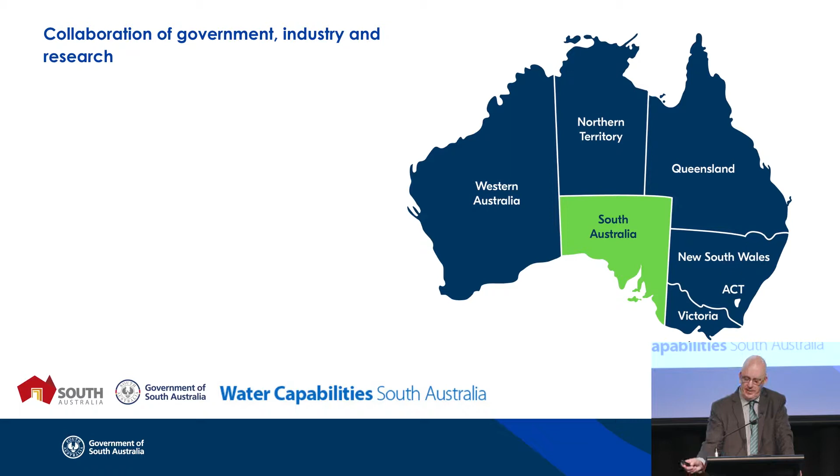So South Australia, it's obviously the central southern part of Australia, and here's a bit of some statistics. We have a population of about 1.7 million people. The capital is Adelaide, my hometown. An area of 984,000 square kilometres - Google's a wonderful thing, I Googled the size of New Zealand this morning, and that's actually about 4 times the size of New Zealand.

We have around 27,000 kilometres of water main. We distribute around 200 gigalitres of water each year. Our Australian Water Quality Centre undertakes about 300,000 water quality tests each year, and we distribute all of those 200 gigalitres in accordance with the Australian Drinking Water Guidelines. On the wastewater side, about 9,000 kilometres of sewer, 370 kilometres of recycled water main, and we recycle on average about 35% of all of our wastewater produced.

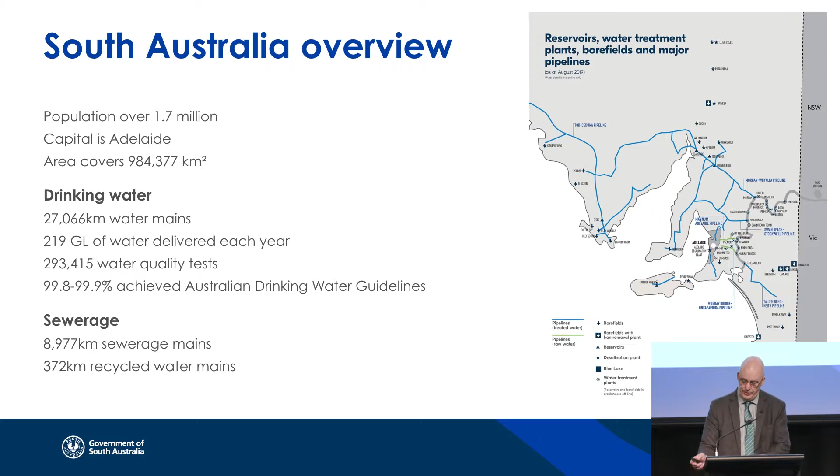We have a diverse range of water sources. The River Murray is on most occasions our main water source. It's about 80 kilometres from Adelaide, and we need to pump water over the top of the Mount Lofty Ranges. We also use natural catchments in the Mount Lofty Ranges for a large portion of our water supply.

Desalination - we have a major desalination plant that was built during the Millennium Drought. Groundwater is also a source of water for a number of our regional centres. And as I said, we recycle about 35% of our wastewater.

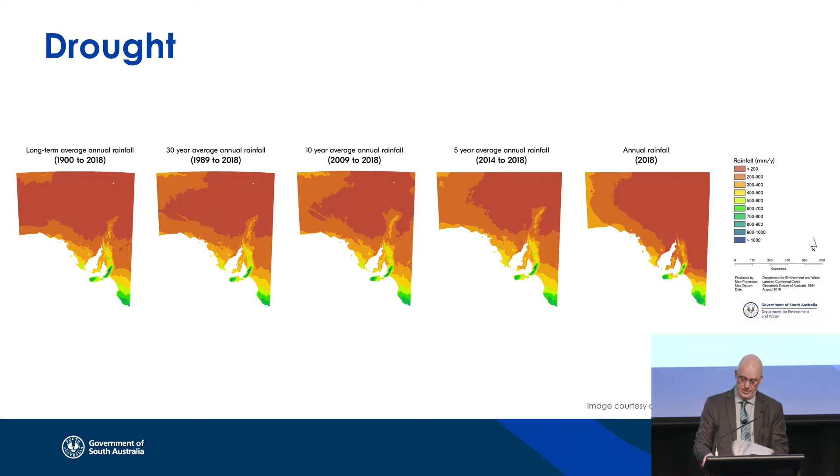And to show you the flip side, that's the Callamurra waterhole in the far north. The shot on the left-hand side is from 2004, in the middle of the Millennium Drought, and the shot on the right-hand side is from 2010. So it shows you how quickly things can change. As I said, there's the same amount of water in the world this year as there was last year and will be next year - it's just not always in the place you want it at the time you want it.

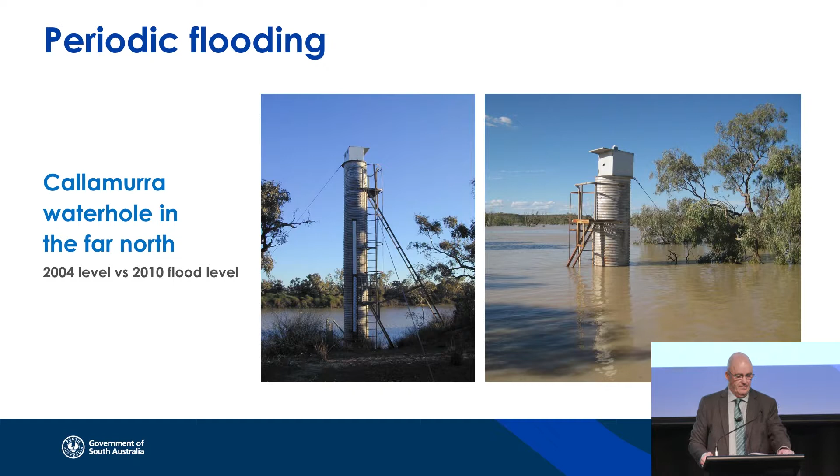I touched on the Murray-Darling Basin system before, and as I said, that crosses 4 jurisdictions effectively: Queensland, New South Wales, Victoria and South Australia. And I guess if nothing else, the Millennium Drought really showed us in Australia that without effective cross-jurisdictional management of water, the country was in a lot of trouble. And what that meant is that we had to establish some very strong ties between government, industry and our research organisations.

And that's really, I guess, the main topic of my talk today - to reinforce to all of you how important it is for water management to have the 3 levels of our water industry working effectively together, and to put in place those connections and partnerships, because when you're trying to manage water in a country the size of Australia across all those different government levels, having those strong connections between government, industry and research is really critical.

We put in place, through the Murray-Darling Basin Authority, the Murray-Darling Agreement, or the Murray-Darling Basin Plan. It is in operation today - 10 or more years since it was originally put in place - and it effectively manages the water split between New South Wales, Victoria, South Australia and the environment. It recognises the comment I made before, that without effective use of water in the environment, you don't have a healthy river system. And if you don't have a healthy river system, you don't have a good irrigation business, you don't have strong communities, and cities like Adelaide really struggle in terms of water quality. So that was a huge step for us back in the early 2000s.

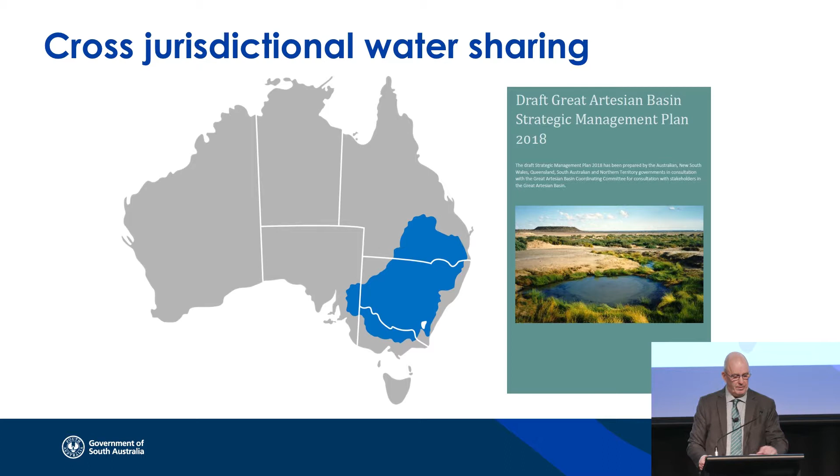It will really test that theory that I had before about strong collaboration between government, industry and research. So to show you a little bit about how our supply sources have changed over that period from about 2005 through to now, and how we expect that to progress into the future.

The large part of the pie chart there is rivers, reservoirs and aquifers, and you can see back in 2005 that was about 75% of our water supply.

Importantly, the light green section of the pie chart there is called water restrictions, and the part you'll notice is that as we look ahead to 2050, there's no water restrictions.

So we really are backing ourselves across all those levels of the industry to be innovative, to meet the demand increases that you can see in the size of the pie chart there, and to not impose water restrictions on our communities, because what we know is that if you restrict supply of water, then that is an economic handbrake to the community, and we saw our gross state product go backwards through the Millennium Drought, and it's not a position that we as a society want to be in again.

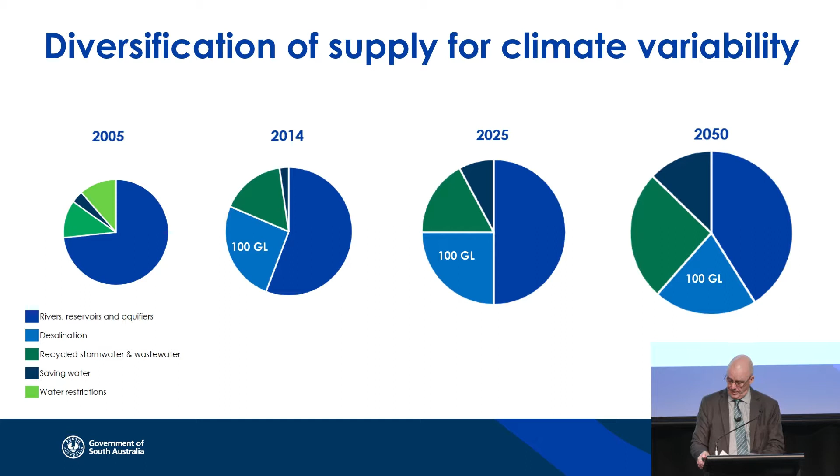So what have all those challenges meant for us as an industry in South Australia? Rainwater harvesting and managed aquifer recharge has been a key component of how we've set ourselves about meeting those challenges. Local, small-scale wastewater treatment and reuse is also key, slowly moving away from the days of large, centralised wastewater systems to more local systems, and I did note that's very similar to the thoughts that Art was sharing.

Energy management and data analytics has been a huge component, and one of the case studies I will talk about will elaborate on that a little bit more. Irrigation efficiency, looking very closely at our irrigation systems and making sure that farmers are irrigating at the right time with the right soil moisture content has also been a big push for us.

Water quality monitoring and response. Water supply optimisation is another case study that I will talk about in a little while. And again, I've touched on the policy frameworks that are really necessary to make sure that we get that cross-jurisdictional collaboration.

You know, we unite pretty well as a country when we play cricket against New Zealand and those sorts of things. We don't always unite that well within our own country. It does take strong government to make sure that our states are working together collaboratively and that we're setting a scene for industry and for our research bodies that can help meet the challenges as we go forward.

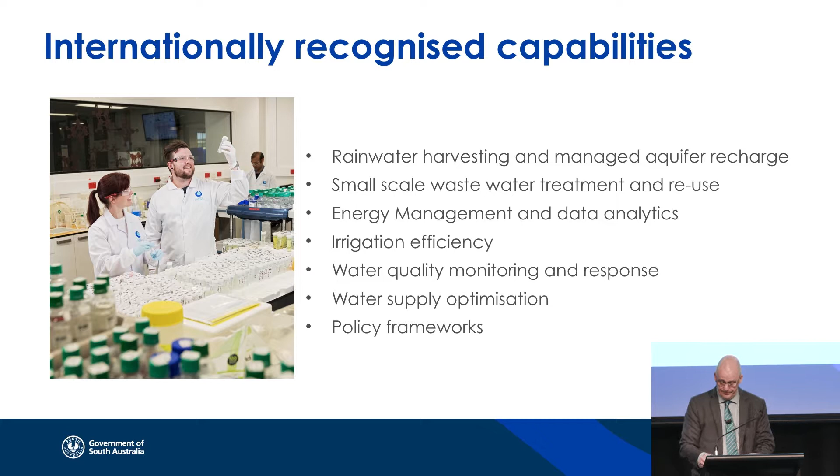So the case studies. Before I go to those, just a little bit about South Australia. I've touched on the 1.7 million people.

SA Water Corporation that I worked for has a revenue of about last year it was about $1.5 billion. We have 1,500 people that work for SA Water, but more importantly, I think, is if you look at the supply chain that supports SA Water every day of the year, so 365 and a quarter days of the year, we supply water and wastewater services to the community of South Australia.

But if you look at the number of people that are actively involved in providing services to SA Water, it would be a number of between 4,000 and 5,000 people on any one day. So we are largely an outsourced organisation, and that really does mean that we need those collaborative connections in place. And we also have about $14 billion worth of assets.

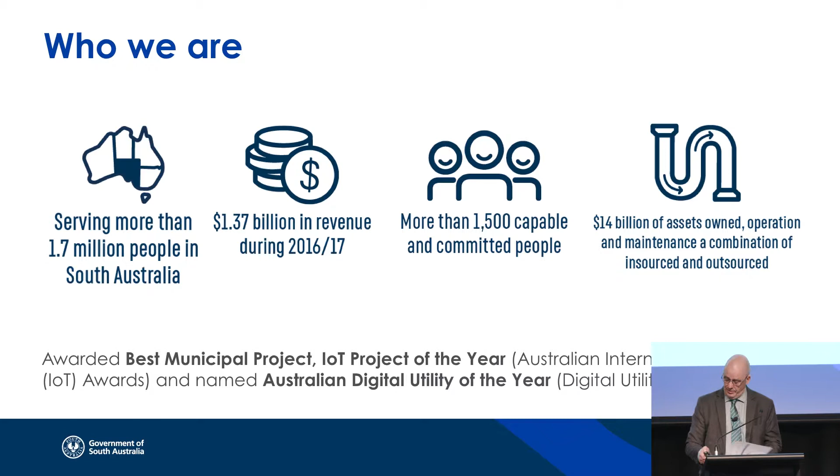So the first of the three case studies that I wanted to talk about is what we call our zero-cost energy future. This exercise focuses on a number of things, but electricity price has been a major cost to SA Water. Last year we spent $82 million on electricity, and our plan is to get us to the point where we will have zero net electricity cost by about the end of next year. It's a very ambitious plan. It makes me feel very nervous, but unless you set yourself a stretch target, you won't push yourself and you won't achieve the best possible outcome.

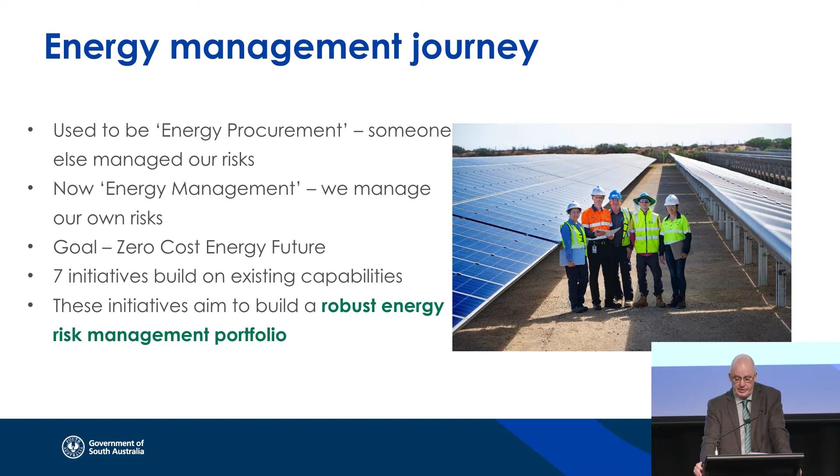So we set ourselves the plan of moving really from energy procurement - setting up a deal with electricity retailers to buy electricity at a guaranteed price - to energy management, effectively managing our own risks. The zero cost energy future is actually built around seven key initiatives.

And they are, firstly, demand response. What we know with our system is that a tank is actually as good as a battery, so that if you can fill your tanks when electricity price is low and empty them when the price is high, then that's as good as a battery.

Biogas generation is a key platform for us. Our two major wastewater treatment plants in metropolitan Adelaide, the Bolivar plant and the Glenelg plant, are now almost completely self-sufficient. Bolivar runs at about 93% and Glenelg runs at about 87%. Bolivar, with the right set of conditions, actually puts electricity back into the grid that we get money for. So biogas generation and efficient digestion and energy generation at our wastewater treatment plants is a key platform of our zero-cost energy future.

Backup diesel - we realised that we have multiple diesel generators at sites right across our network, and for the large part of the time they sit there and aren't used. We've also worked out that there's a trigger point that electricity price hits when those generators are actually cost effective to run. So incorporating those into the operating system on a more regular basis is part of our zero cost energy future.

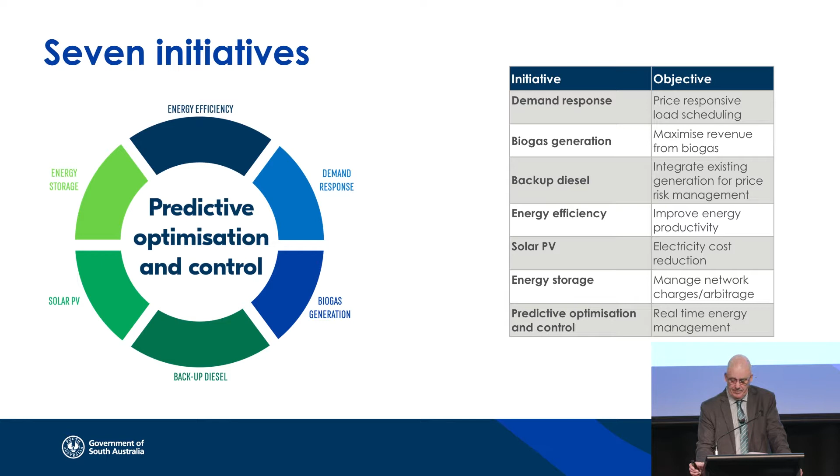And the last two are really the part that we are most involved in at the moment, and that is solar PV and energy storage. So we are in the process of installing 153 megawatts of solar generation at 70 sites across the state - that's up to 70 sites. To put that into context, that's about 500,000 solar panels that need to be installed between now and the end of next year. Coupled with that is 35 megawatt hours of battery storage, which couples with the tank analogy that I was talking about before.

The statistics are interesting, but that's an investment of around $390 million with a payback period of about 5.5 to 6 years. The part that really makes it interesting is if you think about those 70 sites and you think about an electron that is generated from a solar panel. When that electron's generated, you can do one of three things with it. You can use it in the pump or the facility that the site, the panels, are located alongside.

You can put it into the battery and store it and use it later on, or you can put it back into the grid and the retailers will pay you some money for it. So the real question is, how do you decide what to do with that electron? Because overlaying all of that is the need to supply water and wastewater services to our customers as well.

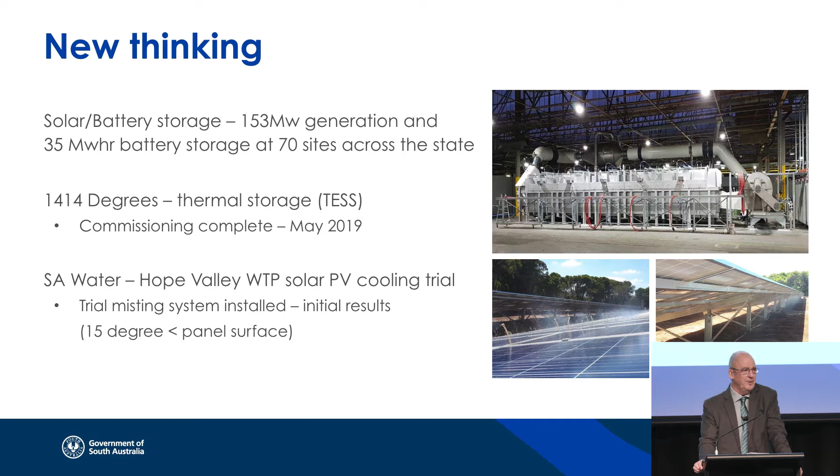The next case study I wanted to talk about is our smart networks. We work in a regulated environment in South Australia. The Essential Services Commission of South Australia is our economic regulator, and one of the things we do to inform how we invest our customers' money is to ask them how they would like that money invested.

They were very clear when we spoke to our customers about the 5 key things they expect from SA Water. Firstly, they expect safe, clean water—it goes without saying in a first world country. They want assurances on price and serviceability. They want water security, which we've touched on before. And they want consistent high quality water, so water that's not only safe but tastes good to drink.

The second most important thing behind safe water was minimal interruptions. One of the things we noticed is that the central business district of Adelaide is quite unique in the distribution system, and we noticed we were getting a significant increase in the number of water main failures in the central business district. It was about double where it was in other parts of the state, and obviously that comes with a huge community exposure.

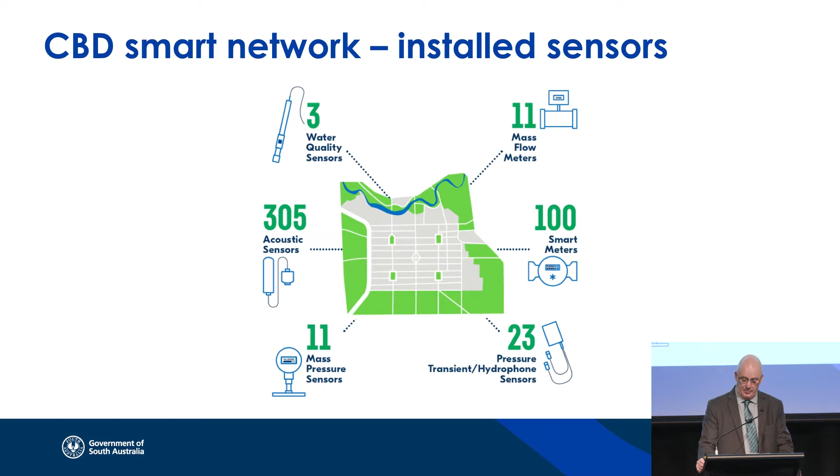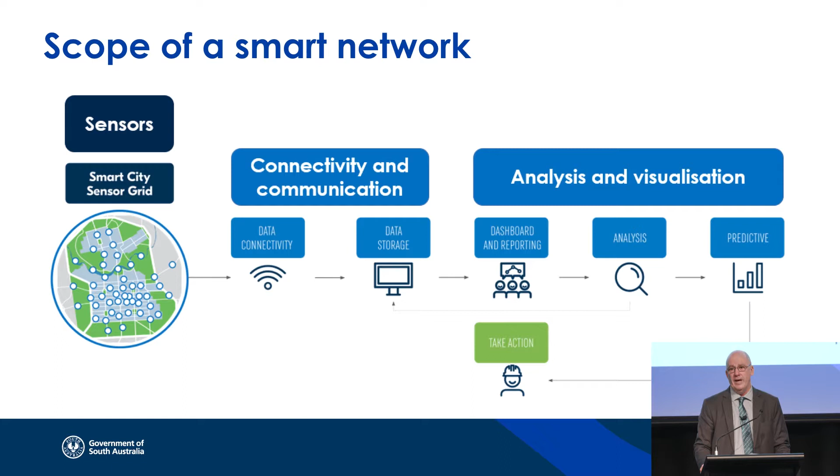What we did with all of that is connect it effectively through the Internet of Things. All of that information goes into a data storage and data analytics area, and the same smart people working on the data for Zero Cost Energy Future are also working on the data here, looking at what trends start to project a water main failure. So what we now have is a system in the Central Business District of Adelaide that gives us predictions of when our water mains are going to incur a problem.

So what has that done for us? The upshot is that we're now at a position where we've been able to predict ahead of time about 50% of the water main failures we experience in the CBD. Whilst that doesn't stop the main from failing, it does allow us to fix those failures outside of normal business hours. So we minimise the impact to our customers, we minimise the exposure we have as an organisation.

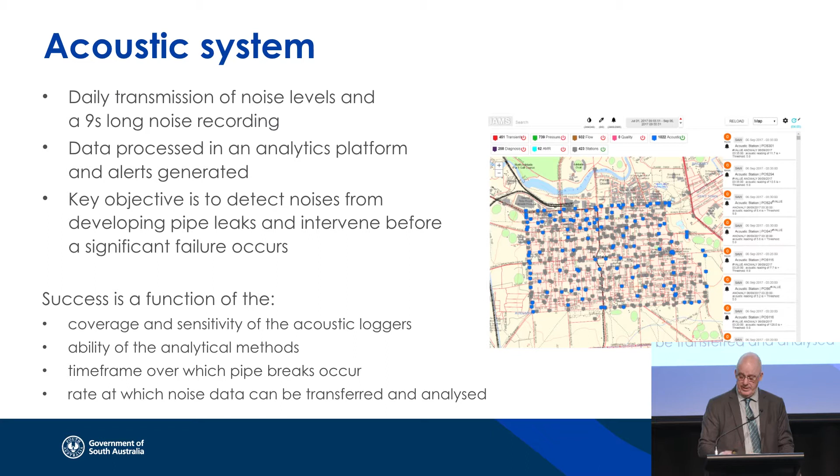The really interesting part is that when we do our customer research and ask customers about their perception of SA Water and what they want from us as an organisation, those that have heard about smart networks have a dramatically increased opinion of us as a utility. We really do think this is the way of the future. I've touched on most of those, and that's the result.

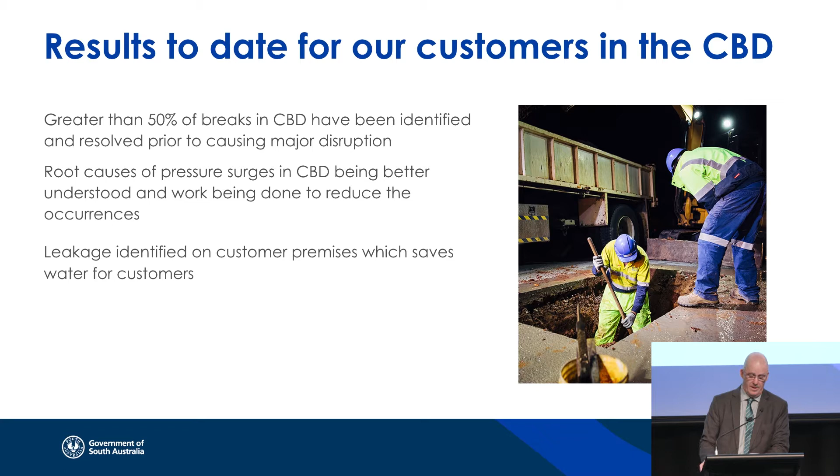So the next steps - we're currently trialling, we've expanded our smart networks in the Central Business District to North Adelaide, which is just to the north of the CBD. We're also looking at sensors on major trunk systems so that we hope to be able to install predictive sensors on our major trunk mains on main arterial roads to minimise the impact to traffic.

We're looking at improved pressure management and pressure modulation, and expanding the use of smart meters in our distribution system. What we've found is that whilst there's a benefit to the customer, particularly large use customers, the information we get in terms of time and volume of water use at certain times gives us really good data to better plan and manage our distribution system. We've also started to look at smart networks on the wastewater side, installing sewer overflow devices in high overflow areas with some really good results in predicting when an overflow is likely to occur and fixing it before there's a problem.

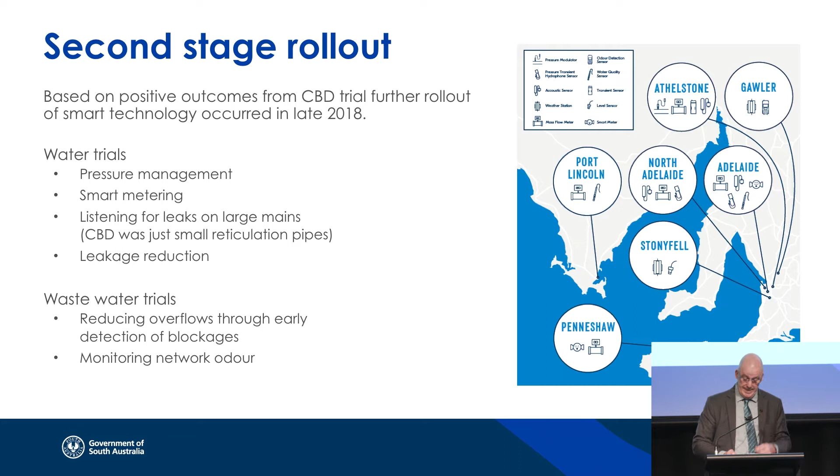So smart networks has been a success for us and something that's certainly improved our brand as an organisation. The last of the case studies that I wanted to touch on is what we call our distribution optimisation tool.

The point being is that it's a very large and very complex system to operate, and traditionally it was done on zones. So different parts of the city were supplied water from wherever their closest treatment plant was.

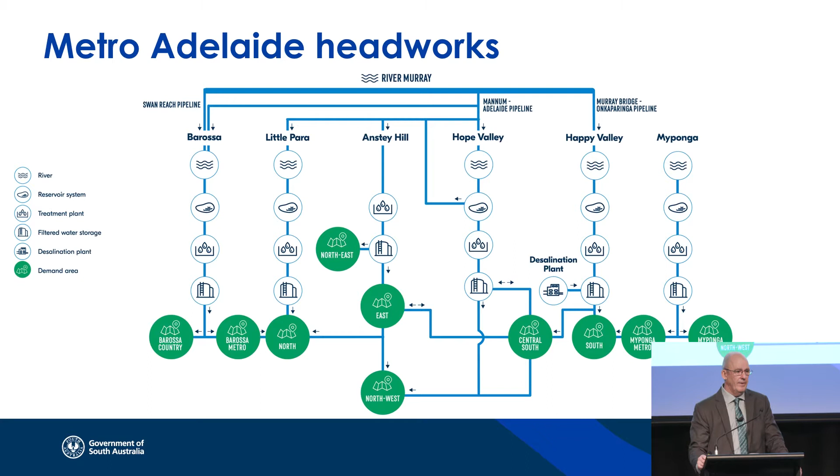What our distribution optimisation tools have enabled us to do is manage those conflicting factors - the balance of natural inflows into reservoirs, unplanned outages, those peaks in electricity price that I was talking about before. Obviously, with $14 billion worth of assets, there's going to be planned maintenance work that needs to occur. So there's planned outages, changes in water quality, changes in demand, and over time changes in infrastructure capacity.

So the distribution optimisation tools really look at the cost of operating each of those systems, overlay that with electricity prices, and it optimises the way we should operate our very complex system, and the way we should plan for operating it into the future.

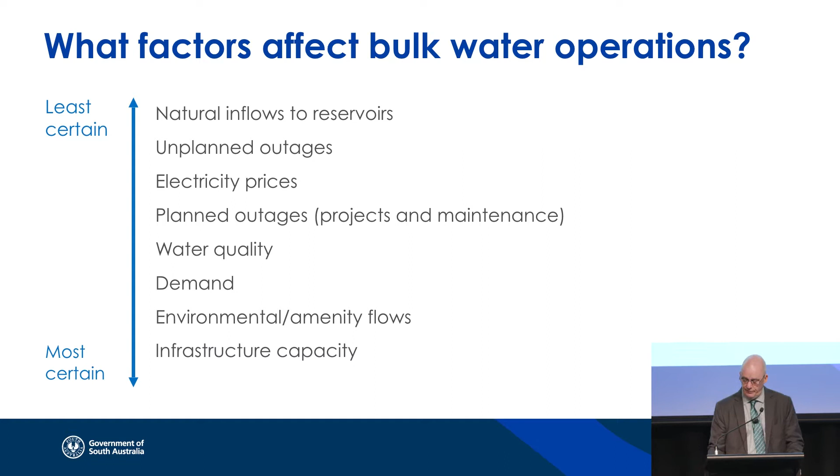It does that on a daily, a weekly, a monthly, a quarterly, and a yearly basis. It's actually the set of tools that we now use for our budgeting, and we manage our 27,000 kilometres across the state using these distribution optimisation tools.

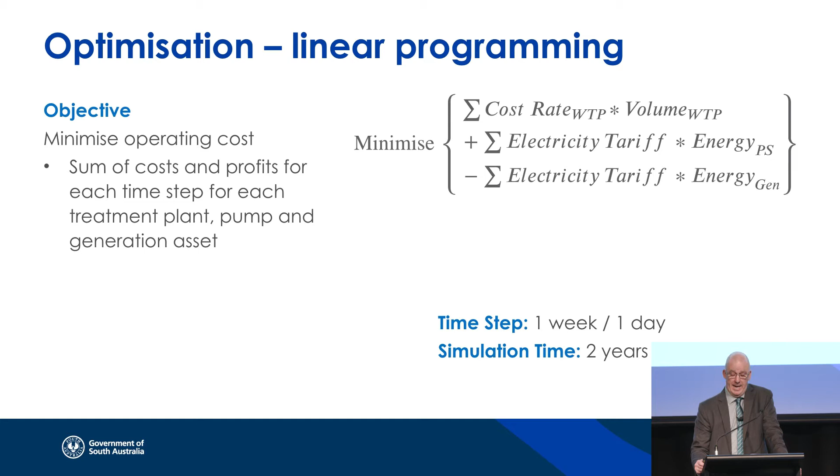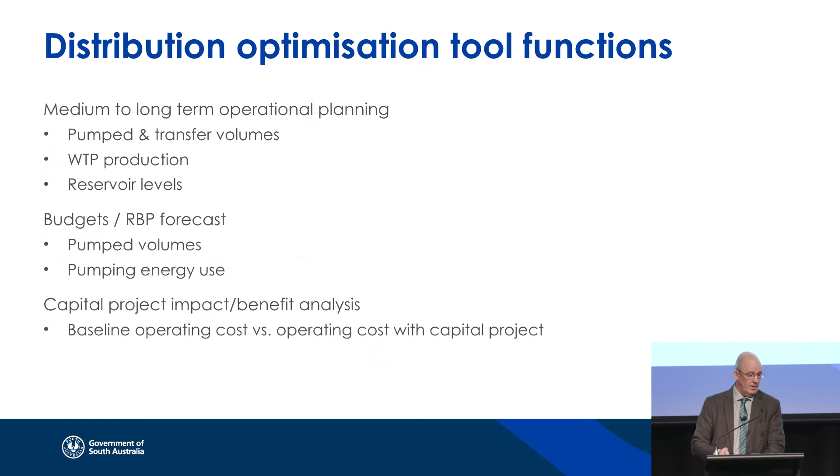So just to wrap up, as I've said a couple of times, all of that wouldn't be possible if we didn't have a really close connection with our supply chain, and if we didn't work across the various jurisdictions in Australia. Through the Water Services Association of Australia, our utilities work very closely - we're pretty good at sharing information. It's an important platform that we have in South Australia. We're a small state by Australian standards, and we can't be successful if we don't work closely with our supply chain.

The message I wanted to leave with everybody is, firstly, as a state, as an industry, and as an organisation, we think we have knowledge that we're keen to share, and that we certainly are open for business. So those of you that have heard something today that you're interested in, please don't hesitate to contact me. I'm only too happy to put you in touch with the right people. We really are open for business as a state.

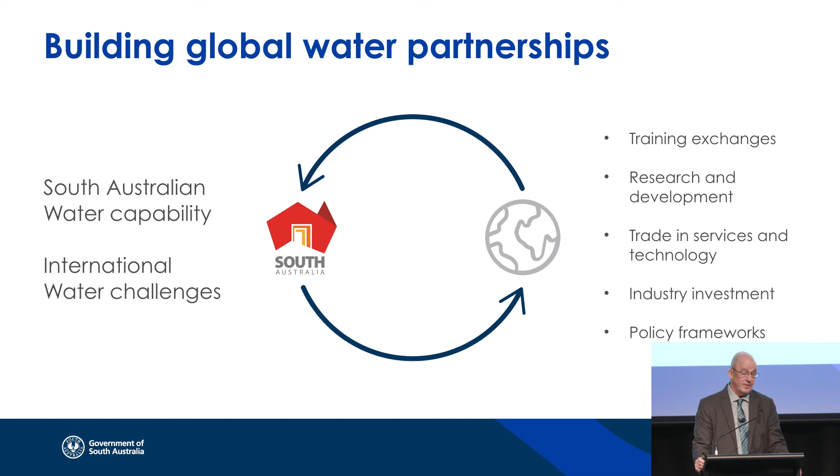We honestly believe that the more people in the industry we talk to, and the more that you share your knowledge with us and we share our knowledge with you, the better our chances of solving those considerable challenges that Art articulately elaborated on before. So we're open for business as a state, please take me up on that offer.